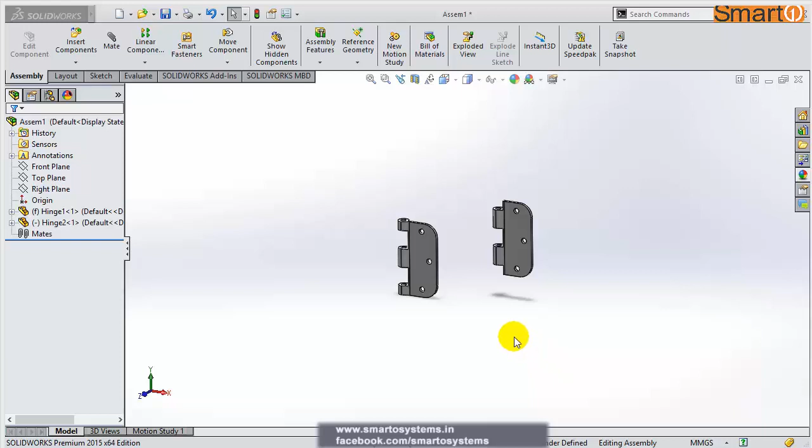Welcome friends, today we are going to learn a new kind of mating, hinge mate. These are two hinges and we'll be mating them using a single mate.

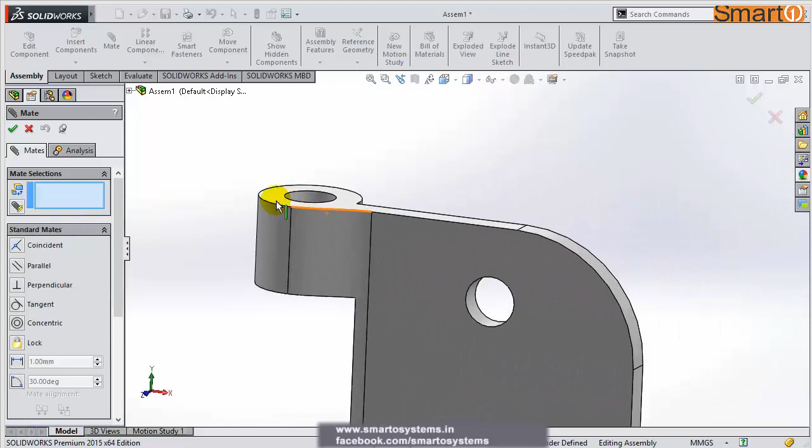There are two ways of doing a hinge mating. Either we can directly use the hinge mate, or we can go through standard mating, making it concentric, then putting it upwards, and then clicking on this face and this face, clicking OK.

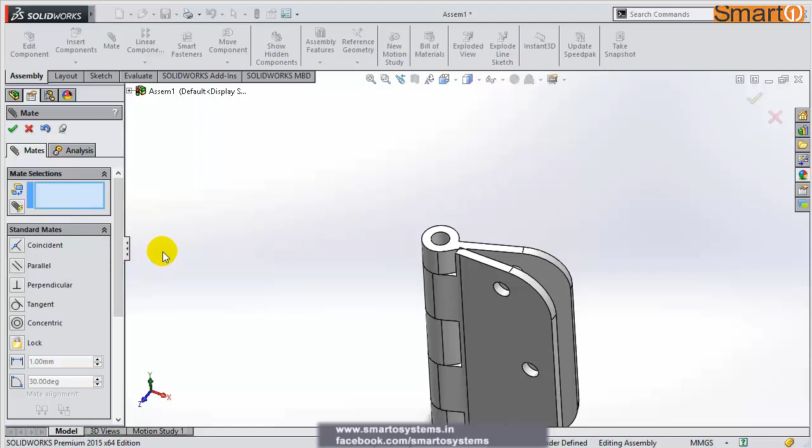Now using a standard mate, we will have to use a concentric mate as well as a coincident mate to make the mating take place, to have the hinge go well. So this is the way in which we do use two mates.

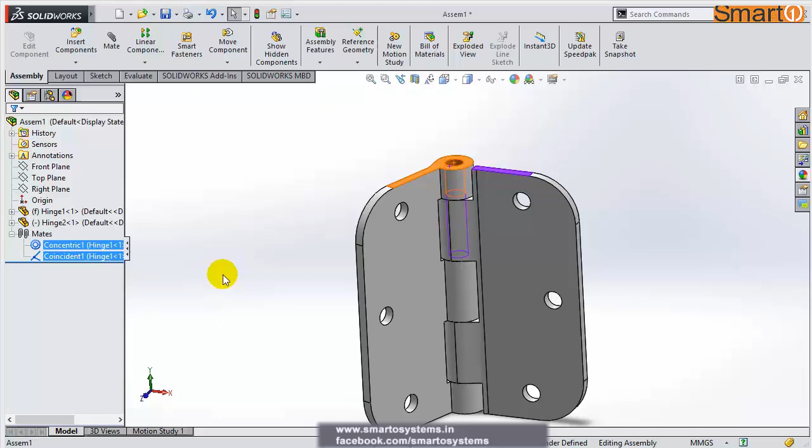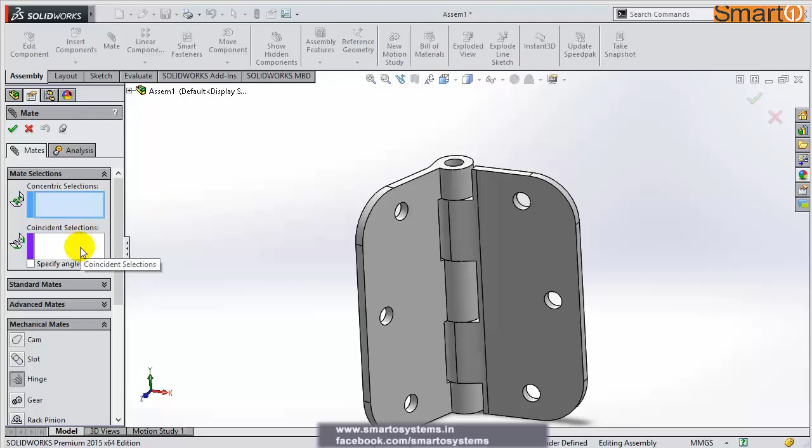But if we do use the hinge mate in the mechanical mates, you can see, clicking on this, both of the matings, the concentric as well as the coincident mating, are covered in one mate.

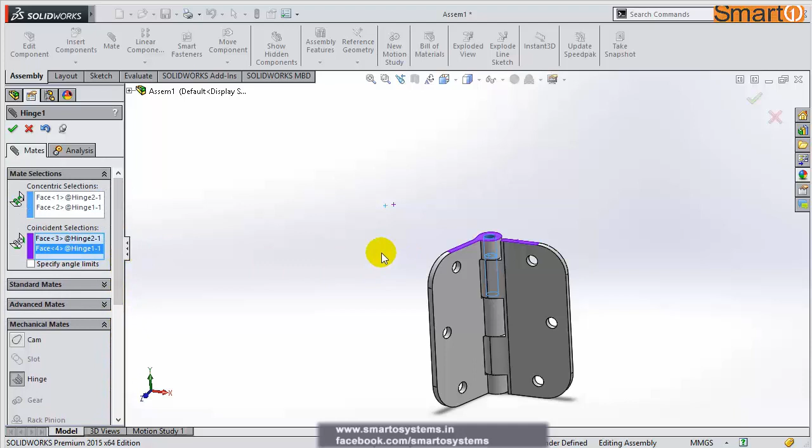For example, I am taking it here. I am taking the concentric selections, clicking on these. Then I am picking up the coincident selections, clicking on this, and these two go in one go. Clicking OK, you can see this is the hinge mate.

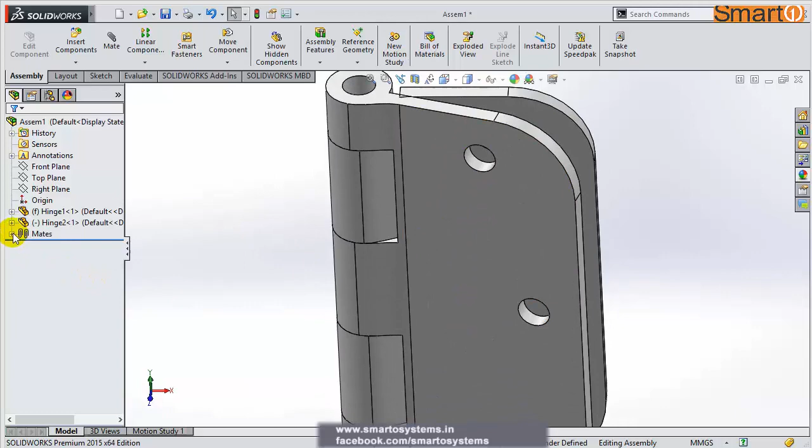Let me show you a typical problem here with the hinge. You can see this hinge is not going proper with this mating. This has to be flipped over. So first of all, deleting this hinge mate to sort out the problem.

And I am going to the rotate component, rotating it like this. Now it should behave well.

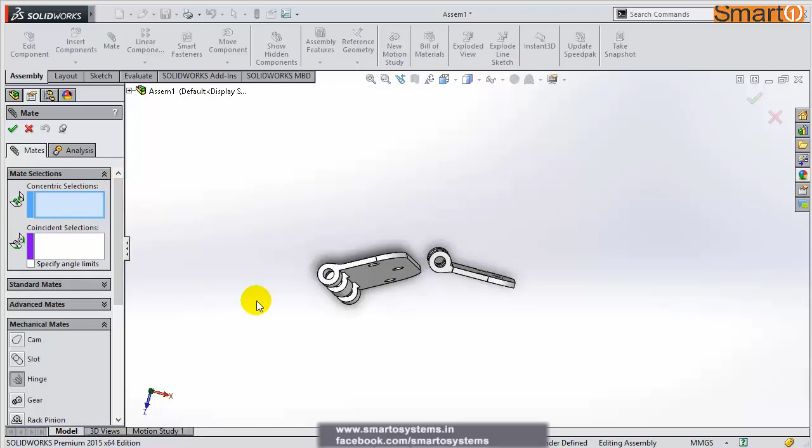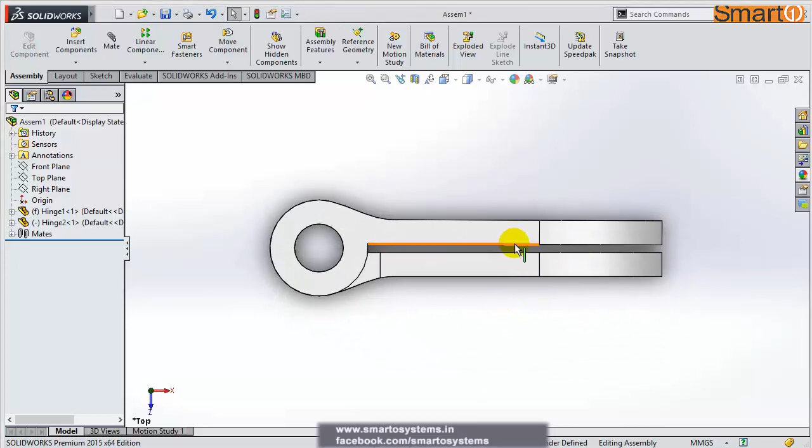Clicking on the hinge, and now picking up the concentric selections, this, and then the coincident selections, clicking on this, and then on this, clicking OK. You can see, showing from the top, these are doing fine.

Now the next option within this hinge mate is to show you. I can specify the angle limits. Clicking on this, either I can make them fixed.

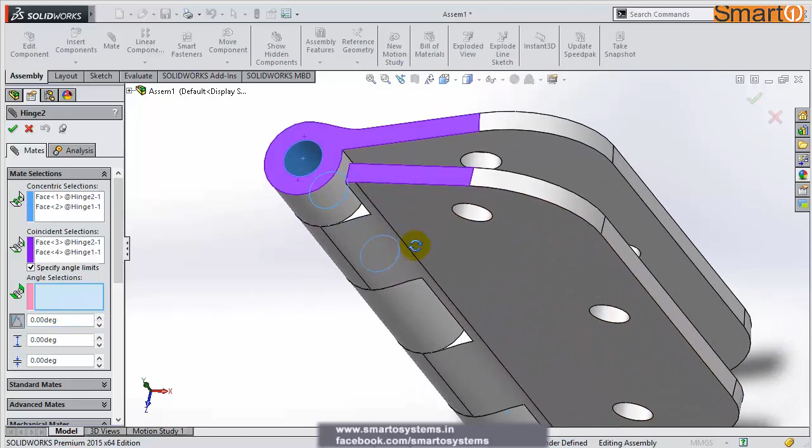For example, I'm picking up this face and then this face. Here is the angle set as 0.

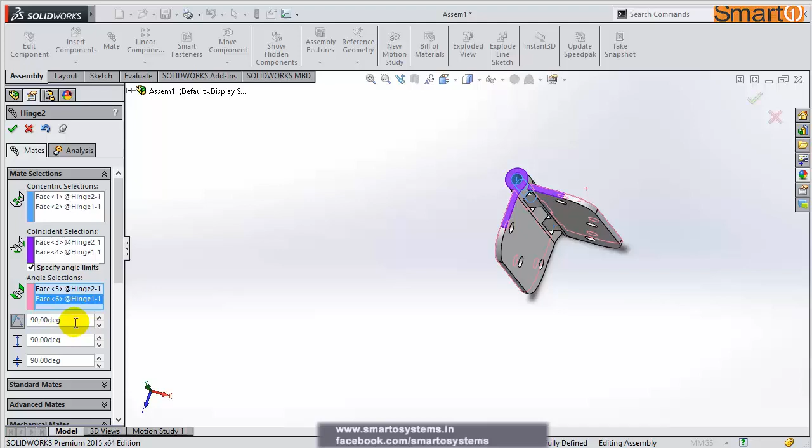For example, I'm taking the angle as 90. It's going in the reverse direction. I can take the angle as 270. So this is the angle mating, the fixed angle mate.

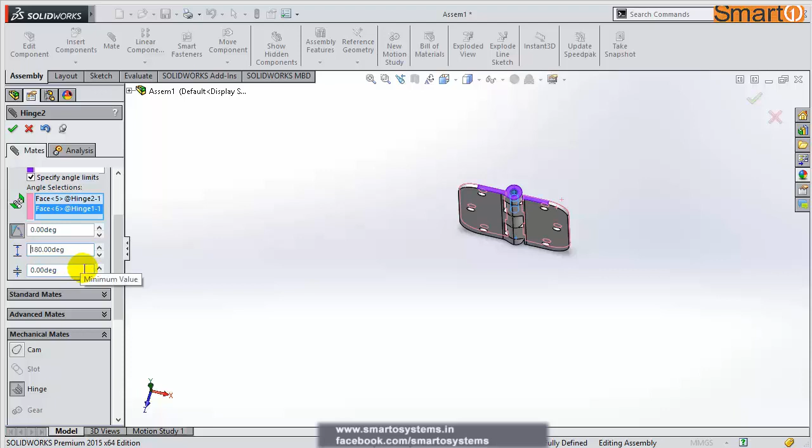But for example, I don't want to take this, and I want to specify the limits. This is the maximum value of the angle. For example, I am taking this value as 180 and this value as 0. So let us see what happens.

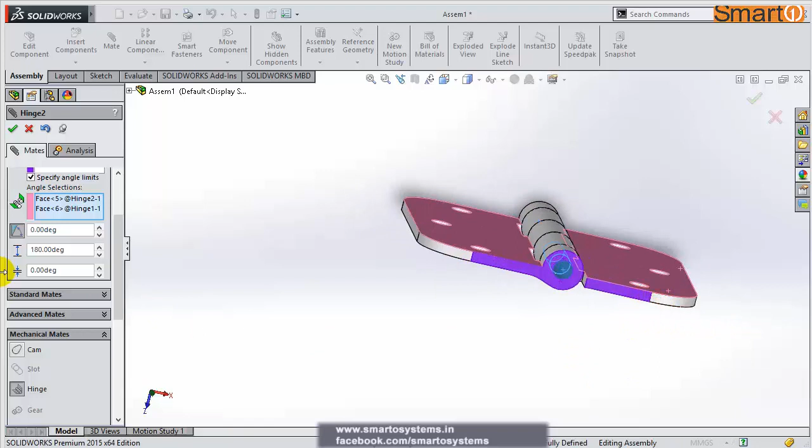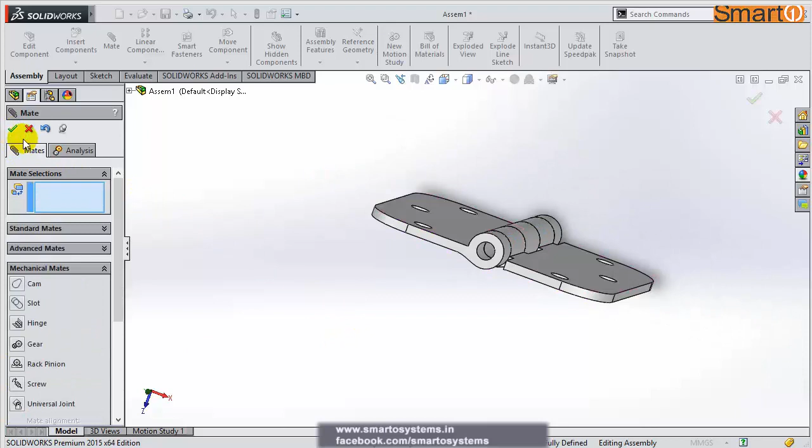So here you can see I have taken this as 0. This is the 0 degree angle, and I have made it go up to 180 degrees as the maximum value, starting from the minimum value of 0 degrees. Now clicking OK, you can see this hinge can go only up to this point.

And let me show you from here. You can see it starts from here and ends up to this point.

So this is a very interesting and a very useful mate, the Hinge mate. Thanks for watching.